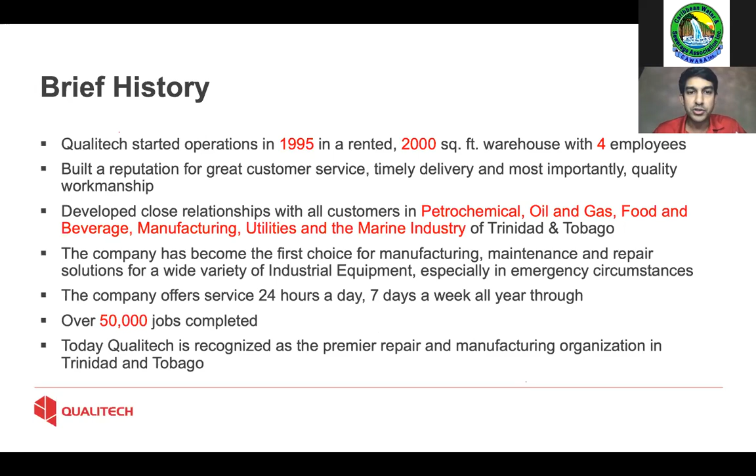And basically, as time evolved, customers kept asking us or challenging us to do more and more. So we would have started off manufacturing simple parts such as shafts, bushings, those type of things. And then it led to us overhauling equipment and even doing everything throughout the life cycle of equipment. So for example, we would engineer, supply, install, maintain, repair, and do diagnostic works on all types of rotating equipment. So we operate in the food and beverage sector, petrochemical, oil and gas, utilities, marine sectors as well.

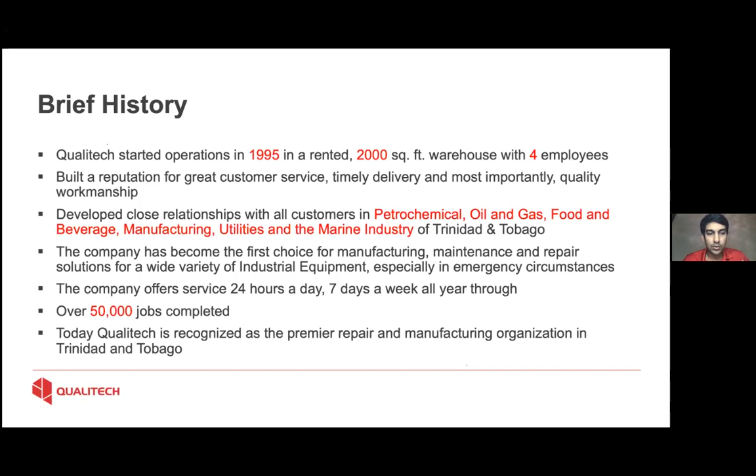We offer 24 hours a day, 7 days a week service, and we've completed hundreds of thousands of jobs. So I mean, this is an old slide, so it says over 50,000, but it's quite more than that.

The size of the company is just over 120 people. A lot of our employees are long-serving staff. All of our founding members of staff are still with us. We have over 100,000 square feet of workshop across 5 acres, which are 2 sites in the heart of the Point Lisas Industrial Estate. And we have a lot of various certifications, which I'll go through a little bit later.

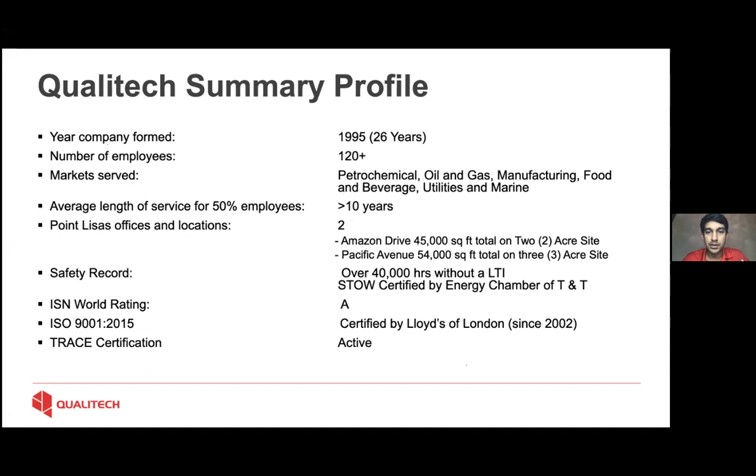So just so you see a little Google map overview, that's our company here. We have 1 site here, and we have 1 site at the end of the street over here. And all of this is the world-renowned Point Lisas Industrial Estate. So Trinidad being one of the energy pillars in the Western Hemisphere, we are the largest producer of methanol and ammonia in the world, or at one point we were.

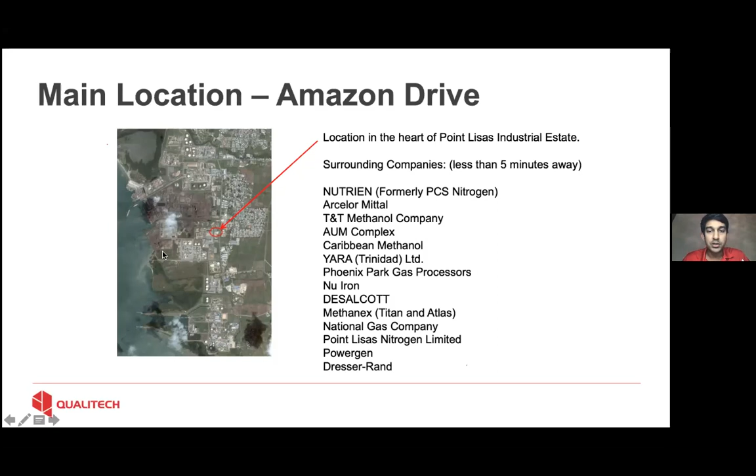Certification wise, because we have a lot of multinational customers, we have prided ourselves on operating as if we are an international player, because we have to compete with the same level of service as that you would have in the UK and America and other parts of the world. So that is one of the reasons we chose Lloyd's, one of the biggest insurers in the world, as our quality management system certificators. So we are ISO 9001 certified since 2002 by Lloyd's of London. So that's just about 19 years.

We're the first SKF certified rebuilder of pumps in Latin America. So SKF, you would know, is a very popular manufacturer of bearings. They're a global company. We're the first authorized repair center for a company called Philadelphia Gear in the world. So they're one of the oldest manufacturers of gearboxes, over 100 years, 125 actually. And they would manufacture things like the gearboxes that would be on the crawler for the platform that would take the space shuttle to the launch pad, large Navy vessels and so on.

Locally, we have something called STOW certification, which is a standard of safety and is mandatory for you to do work in the energy sector. NFPA, which is National Fire Protection Association of America. We are one of the few EASA accredited workshops in the Caribbean. So EASA is a body that is responsible for electromechanical repairs, such as pumps and motors. So we are the first accredited workshop in the Caribbean and South America.

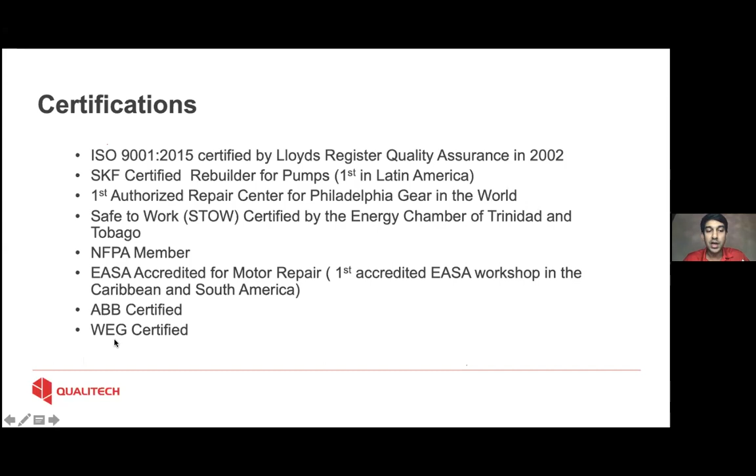So a little more into Qualitech now. We have different divisions: industrial, we have manufacturing, distribution, engineered product sales and service, project execution and management, electrical division, where we repair motors, generators, and so on, and also rentals. So we do every single thing you could imagine to rotating equipment.

So from your pump, your motor, your gearbox, engines, compressors, turbines, we would do everything from manufacturing parts to disassembling it fully, inspecting it, telling you what is wrong, refurbishing or manufacturing the parts, assembling it, and to some extent testing as well, so that you are sure that what we repair is 100% in working order before we send it back to you.

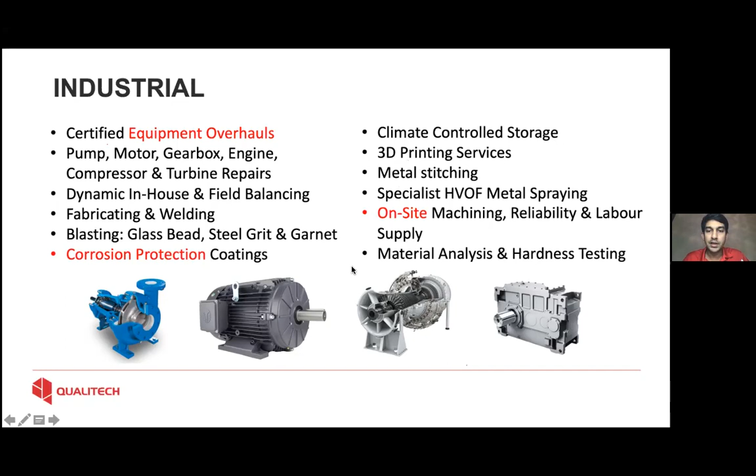The list is quite exhaustive, but some of the more interesting things would be like 3D printing, corrosion protection, fabrication on site. So we actually have the ability to come on site and machine things like flanges and skids for your different equipment, a lot of different things. So there's very little we cannot do when it comes to equipment.

We have a lot of manufacturing capability, which I'll go on further into the presentation, where I can actually show you where we could manufacture impellers from a sample. And over here of interest, we have some of the latest technologies, which are 3D laser scanning, 5-axis milling, and abrasive water jet cutting. So you're literally cutting steel with water.

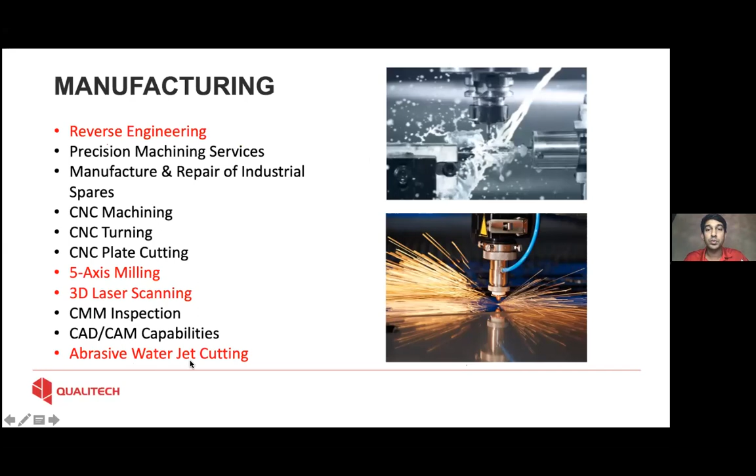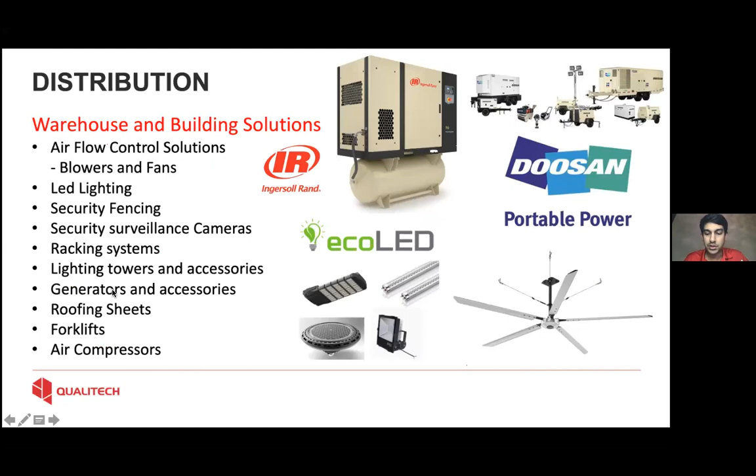Some of the brands we represent: Ingersoll Rand, LED lighting, mobile compressors and generators, lighting towers, and a whole host of other stuff. Everything to do with warehouse and building solutions. We're the agents for Bobcat in Trinidad and also different parts of the Caribbean.

Project execution: you need labor to do a project, you want us to engineer a design for you, you want us to execute it. We could arrange all of that sort of project management. From a supply side, we do a lot of stuff in the petrochemical sector: valves, actuators, rotating equipment, process equipment, heat exchangers, a whole host of stuff.

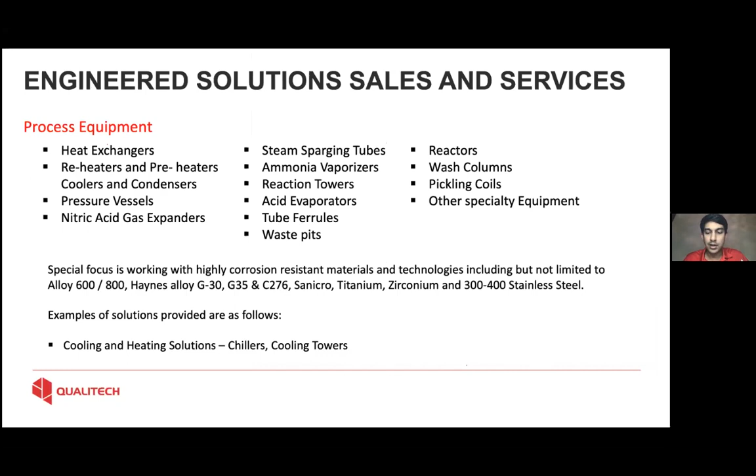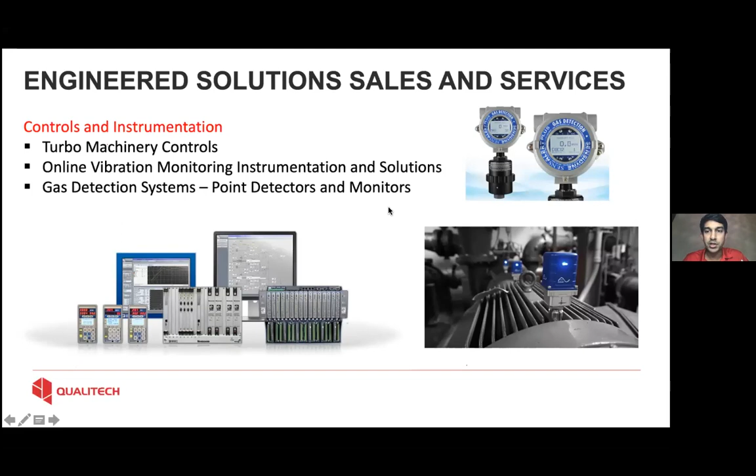Instrumentation and controls. You want remote vibration monitoring of the equipment so that you don't have to physically go out there to see what's going on with your equipment. It feeds you back information so you can see if your equipment is high in vibration or behaving unusually.

This is the electric side of the business, so we can repair motors up to 5,000 horsepower and generators up to 2,000 kilowatts. And that's full disassembly, inspection, rewinding, troubleshooting, you name it. We're quite capable of doing that.

This is just to give you an example of some of the sizes of motors. This is close to a 4,000 horsepower motor, and this is the same one that was completely refurbished, and this is just a shot of one of the motors that was burnt out, being rewound with fresh wire.

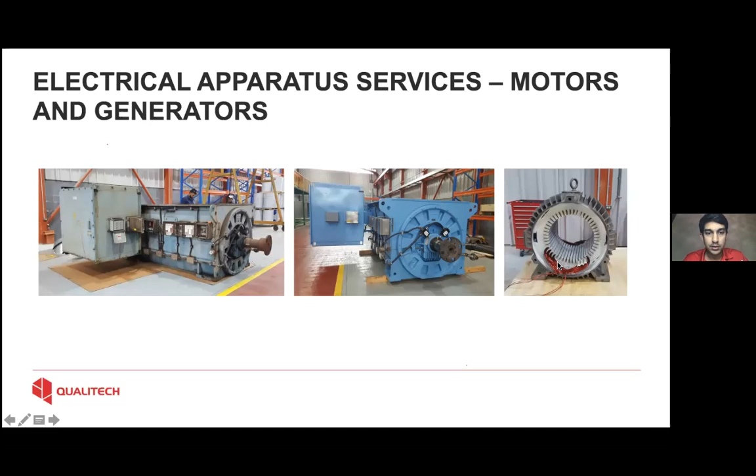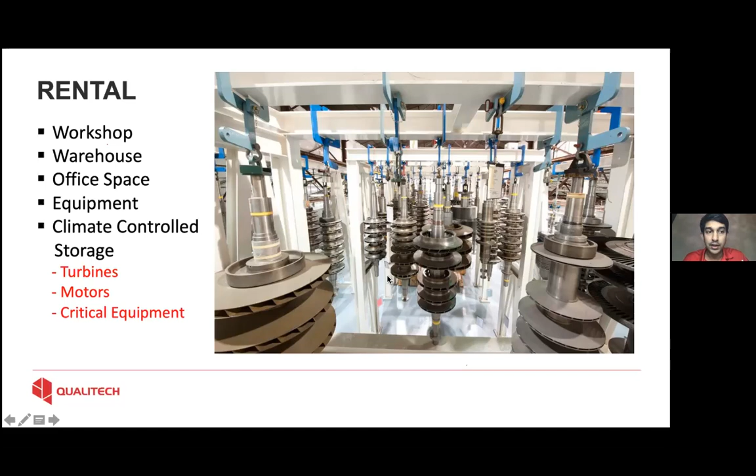We do specialized storage, so we have something called humidity storage, because as you know, the humidity is quite high in the Caribbean. So sometimes if you store products in a warehouse, even though it's sheltered and enclosed and even air conditioned in some instances, you still get rust developing. So we have special climate control storage facilities with dehumidification, where you remove moisture from the air.

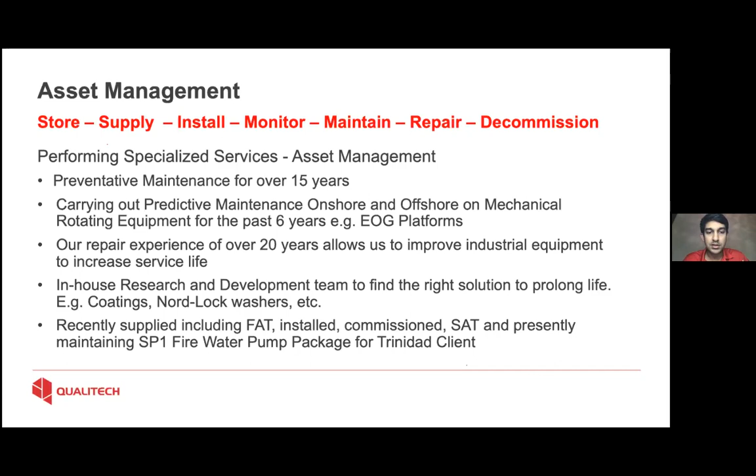This stuff we went through already. This is the whole chain of where we fit in with regards to equipment. And we've also recently added on engineering design. So we've done a lot of work with all the offshore platforms, and we have a lot of specialized solutions, because I always like to tell clients that whenever we do something, we want to do it so your equipment lasts longer. We don't want to see the same equipment coming in for the same repair, because we like to recommend solutions. So that is something we're well known for.

So moving on to the meat of the presentation now: improving pumps, motors, and other equipment. Qualitech has completed thousands of pump and motor repairs for a lot of petrochemical plants, like I mentioned. We've done work in some of the Caribbean islands, such as Grenada, Barbados, Jamaica, Trinidad, of course, and Guyana.

And some people might ask, well, why turn to the Caribbean for repair capabilities when you have the OEM? A lot of pumps and motors and other equipment in the Caribbean we would bring in from the US, the UK, parts of Asia. But one of the downsides of having the OEMs in these countries is that the lead times are long, because oftentimes spare parts are not off the shelf.

Pumps and motors are sometimes very specialized equipment, especially when you're dealing with larger pumps and motors. So it's often very difficult to get a spare impeller or a spare shaft, spare bushings, and all that sort of stuff. So that is why at Qualitech we can actually reverse engineer parts. If you give us a shaft that is worn, we can actually manufacture a new one from the old one. We'll go a little bit more into that later.

And this is basically to save time. Shipping time, as you know, is quite lengthy. Sometimes if you ship via sea, it can take 2 weeks to a month out of the US and the UK. And if you're shipping from Asia, it takes about 2 months by sea.

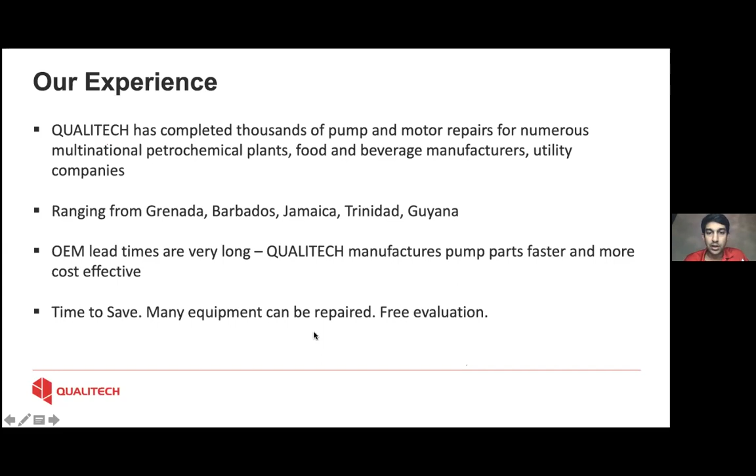So these are some of the reasons why Qualitech started into this kind of business, because the petrochemical sector is a fast-paced industry. Downtime is not tolerated at all, and everybody wants their jobs done yesterday. That is a phrase we often come up against, and that is why Qualitech is outfitted with a lot of these global type technologies.

This is often a sight I see when I go to different water authorities around the Caribbean. There are these quote unquote bad pumps and motors laying around. So when I see these things, I look at it from the perspective that the majority of this cost is in the wet end and also your column pipes.

So if something is wrong with this, it may be something very small in the internals that can be fixed. So here we have 3 large assets, or fairly medium-sized assets, that have been rendered unusable. But I always encourage clients, if you think it's unusable and you're willing to ship it across to us, we can evaluate it for free and let you know if it's repairable or not. If it's not repairable, we can dispose of the asset for you.

And if it is repairable, we can quote you and get your spares in a better position, because it would have been quite expensive to buy these 3 pumps here, and they've been laying in the yard for quite some time, as you see grass growing. So it's really about, in these hard and trying times economically, making the best use of your assets, especially the ones that are in the laydown yards.

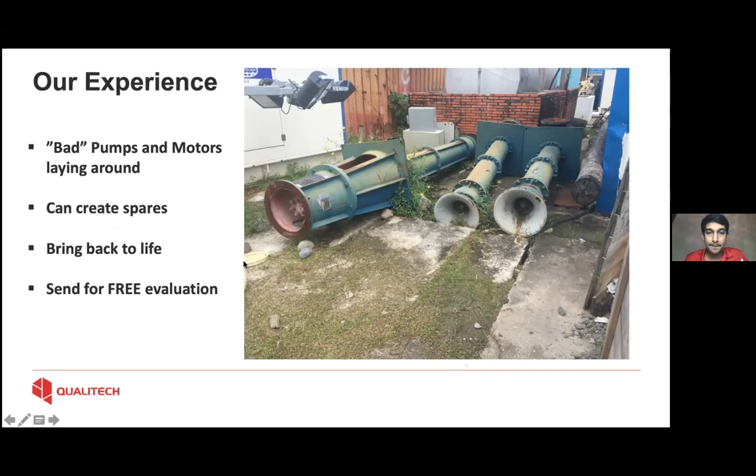And from these, depending on what it looks like, we can also create spares and create some redundancy in case you have emergencies with your existing equipment. At least you have a backup. So going a little bit more into the presentation here, what I have done is I've selected certain parts or types of equipment and basically described what we do to enhance it.

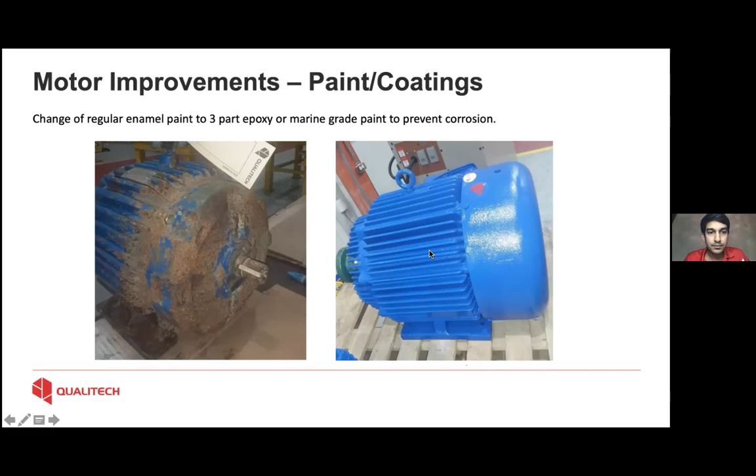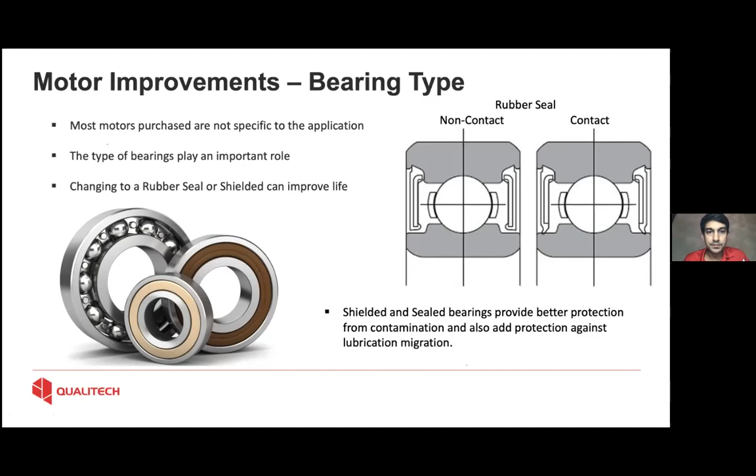Another one we see quite often is the fan guard. So on the motor, you will have your fan, which provides cooling, and your fan guard is basically to protect the spinning fan from hitting anyone's fingers or getting caught up with anything. So over time, you get these fan guards being rusted, and people would normally buy an entire new motor, or they may get a spare fan guard from the manufacturer.

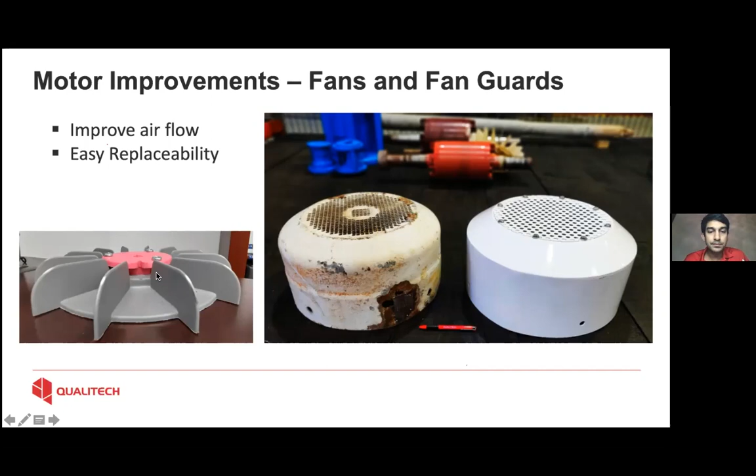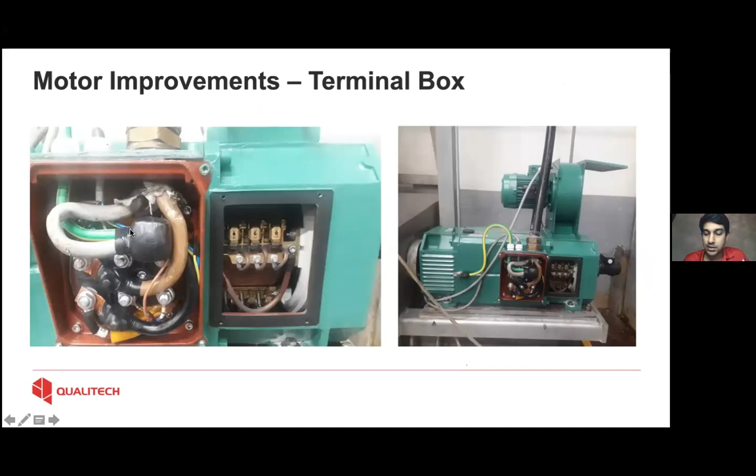For vertical oriented motors, we actually improved the design by making what we call a top hat. So in your vertical type pumps, if you have heavy downpour, as we do in the Caribbean, especially during hurricane season, a lot of the water will enter straight through the fan. And if the seal between the shaft and the housing is not in good order, you find all of that water now rushing into the internals of your motors, which could cause damage and even burning.

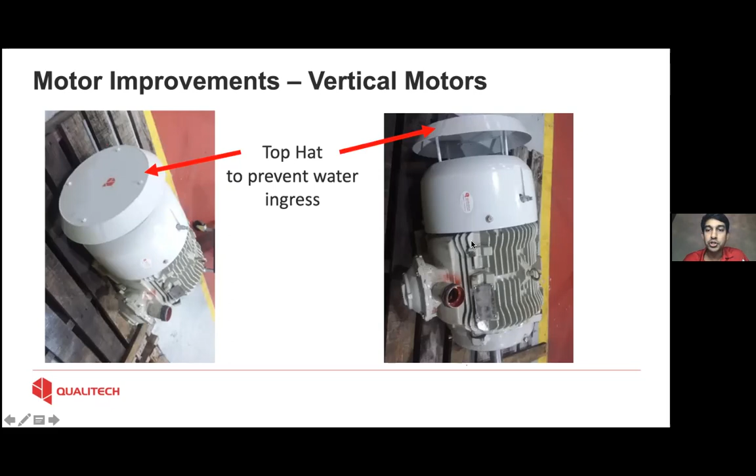So to prevent a lot of this torrential downfall from going directly into the motor, we design a simple top hat here that will remove 80%, 90% of the water from coming straight into the motor fan guard area.

Over time, we've seen a lot of failures where upgrades are being considered. So as you know, the application of VFDs or variable frequency drives is one to conserve energy. You don't want the full rated speed of your motor. So the VFD basically will throttle that down. So when you don't need to pump at full capacity, it will vary it from, let's say, 3,600 RPM, you could go down to 800 RPM. So you save that energy.

What happens though is some motors are not VFD friendly. So what we do when we repair motors is we use something called an inverter duty wire. What this means is that you increase the capacity of the wire in the motor to tolerate higher temperatures. So when you put a VFD onto a motor, you want to really make sure that that motor could handle the VFD, because of the VFD varying the frequency, you get higher temperatures in your motor. And if your wire in your motor cannot handle that, you get a lot of failures through burning, right?

So that is just something to be aware of when you apply a VFD to a motor. You really want to check that motor and make sure the wire is inverter duty wire. Class H is what we use, which is a very high standard. I think it could take temperatures up to 180 degrees Celsius.

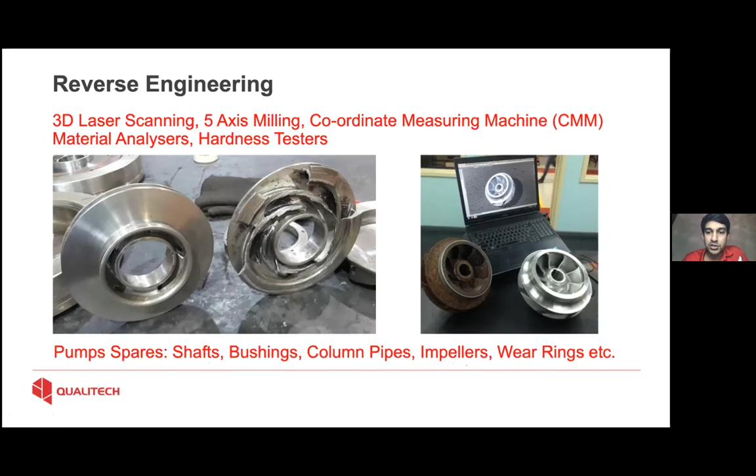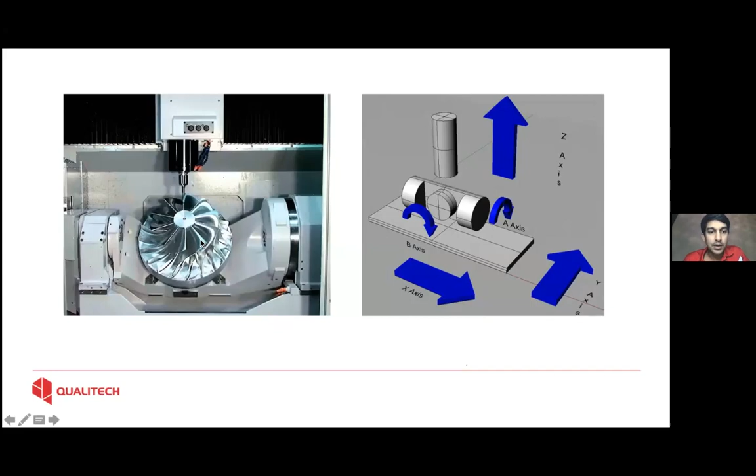So you may ask, why cut with water? Why not use an oxyacetylene torch or plasma? The beauty about cutting with water is that there's no heat. When you don't apply heat to metal, you do not alter the material properties. Sometimes with fabrication works such as welding, the sheet gets warped or bent, and even if you're working with straight pieces of metal such as angle iron or RHS, with a lot of welding, it gets distorted and bent, and it also weakens some of the joints. So that is one of the reasons why we use water jet cutting.

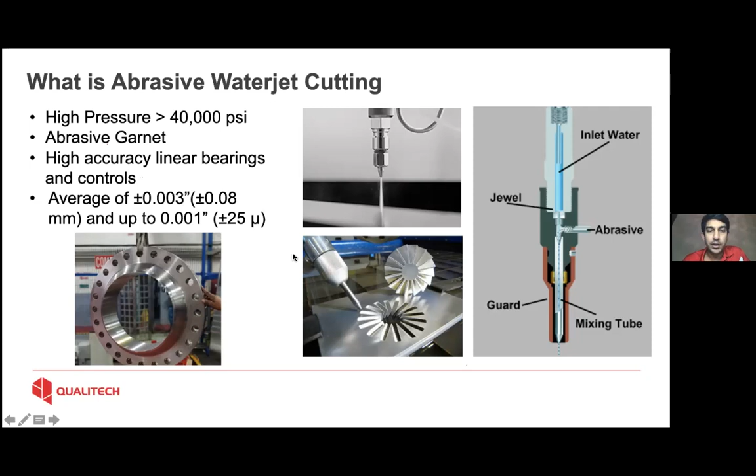Some of the advantages too are that you can cut very thick material, up to 8 inches thick: steel, stainless steel, stone, glass, plastic. Like I mentioned, little to no finishing or post-processing, no high temperatures involved, a very high degree of precision and accuracy. And you can cut basically anything you could think about because all the drawings are done in a computer. So if you want to literally draw a shape, a pattern, a design, you can water jet cut that out of any sheet material.

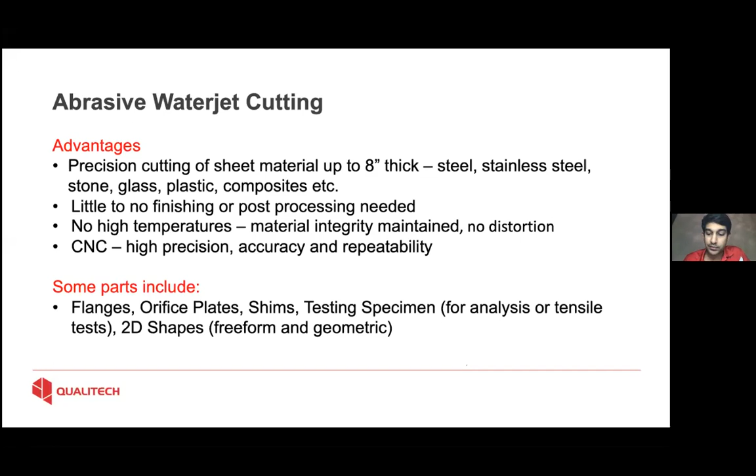Another thing we do that can extend the life of your equipment is called abrasion resistant coatings. For example, in pumps, and I'm not specifically talking about water authority type pumps here, you have other pumps in manufacturing such as slurry pumps, or pumps that would pump a product like sugar water or salt water that is very harmful to the internals of the pump.

These abrasion resistant coatings, when you apply them to the impellers or the casing or inside of the pipes, prevent wear over time. For example, in the water authorities, you may have large pipes that suffer what we call wall loss. Over time, water and different chemicals in the water erode the internal of the pipe. So the thickness gets thinner, which could lead to holes and eventually leaks. So abrasion resistant coatings help prolong the life of these pipes and also the parts inside of the pump.

We've had cases where clients would actually send brand new pumps to us to coat them with these abrasion resistant coatings, and they get an extra 5 to 10 years life. What it also does too is that it prevents the internals of the pump or the pipes from getting rough over time. So it maintains a smooth glass-like finish, which helps with the efficiency of the pump, and it also prevents corrosion. So over time, the coating would interact with the medium that is being pumped. So it doesn't actually attack your raw material per se.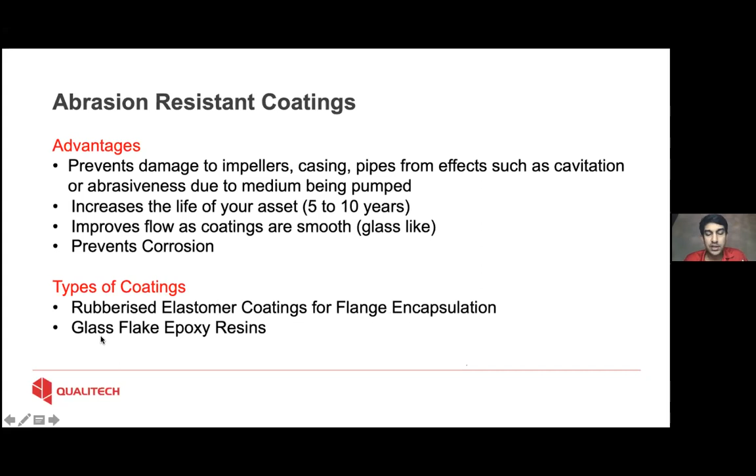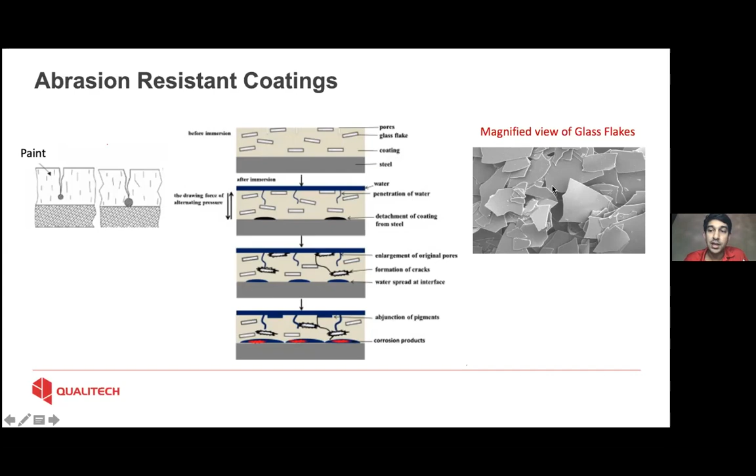You'll be surprised to know that these glass flakes are used in, if you have any ladies in the audience, a lot of nail polish. So that the nail polish doesn't crack, they actually utilize glass flake technology in nail polish. That's just an interesting fact.

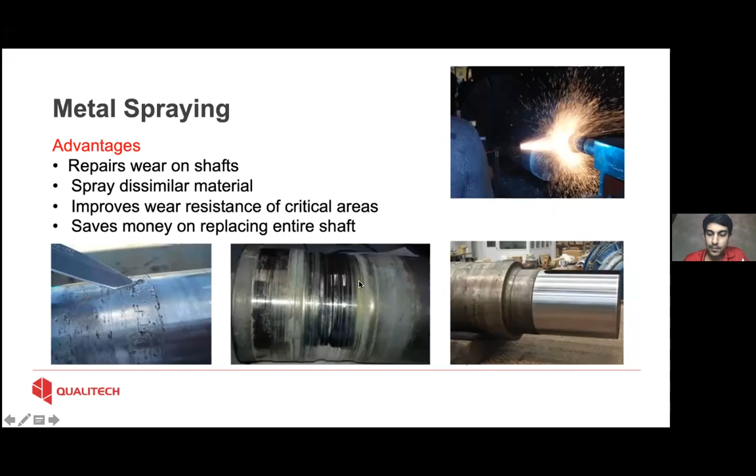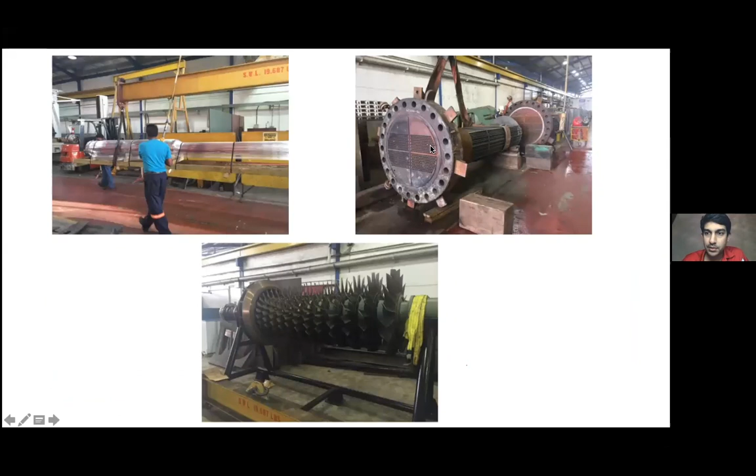These are some equipment we would have procured, a fire water pump, a vertical turbine pump. These would be some heat exchangers, just to give you some perspective in terms of the size of equipment we would deal with. This is a pump from Jamaica. These are some axial split pumps, horizontal split pumps, high pressure multi-stage boiler feed pumps.

So in this one in particular, this element of impellers would have worn and this would have dropped onto the casing. So here we're actually rebuilding with welding all of the different landings to bring it back to the original spec. And here we would machine it back to size.

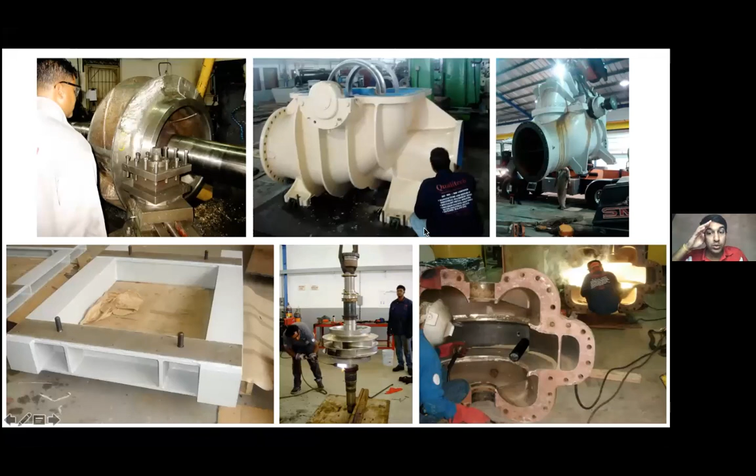These are some more works on pumps, again, rebuilding worn areas, two portions of the pump, removing the impellers here, manufacturing these skids. So sometimes you get a lot of corrosion with these skids. Some clients have actually invested in stainless steel skids, very expensive, but they don't want the hassle of having to repaint and repair, and then you're having downtime with the equipment. So they've manufactured skids out of stainless steel, so it lasts for a lifetime.

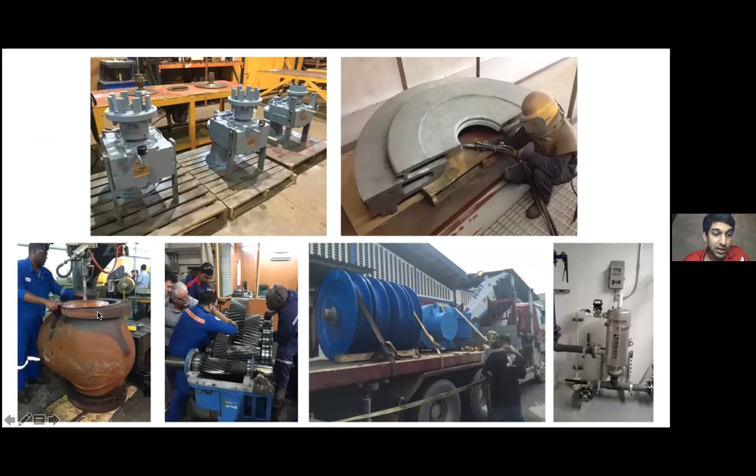These would be some gearboxes we'd have repaired over the years. Blasting technologies to clean, so this would be glass bead blasting, winches, a large gearbox for a ship to overhaul. This is a valve actually, one of the large valves on the plants where we are redrilling holes for the flange connection. Automatic filtration for potable water.

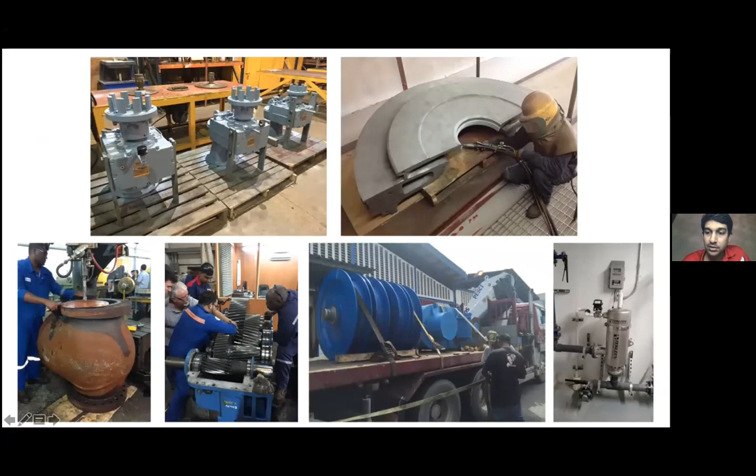So this is an automatic backwash filter. So when you have dirty water coming in here, if the sieve or the filter gets blocked up with debris, the pressure inside here increases and it initiates a backwash cycle. So the water flow will reverse and it will actually wash out all of the debris. So you don't have to keep changing filters all the time.

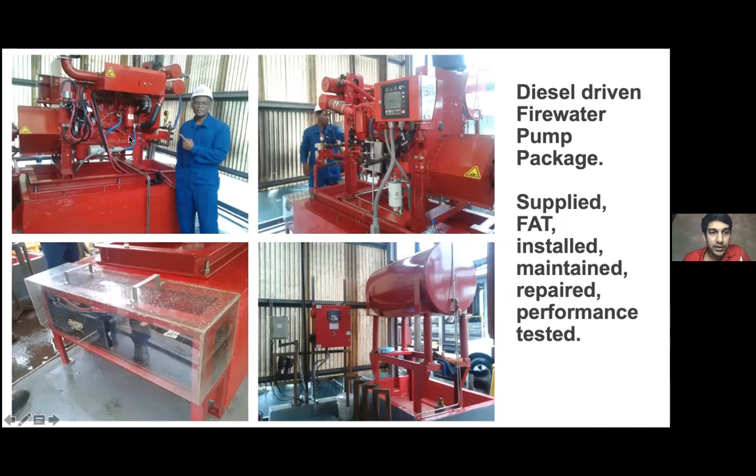This would be a full package of equipment, a diesel engine, electronic controller, diesel tank, valves, pumps, batteries that we would have supplied and installed for a client. And these are a lot of the different customers we'd have worked with over the years. So a lot of multinational clients, from Norway, America, Canada, Shell, which is Dutch, Canadian, British Gas. Well, that's no longer there. Shell has bought over them. A lot of manufacturers, Nestle, Blue Waters, electrical companies, cement plants, anybody really in the industry.

And yeah, that's a bit about what I recommend and some of what Qualitech does. And I open the floor to any questions.

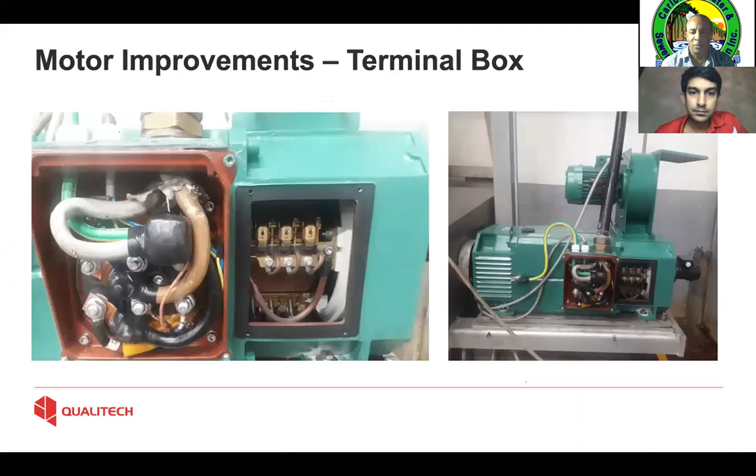Hi, afternoon, everyone. Yeah, thank you. Go ahead. It's not really a question, but more like a confirmation of what they're doing. We actually do wastewater treatment at one of the oil and gas companies that they do work for. That's PPGPL. Right. And so what happened is that one of the submersible wastewater pumps, on the design, there's one of the parts that the OEM representative in Trinidad did not have. We needed a second strainer on the suction.

There's one strainer that allows probably around 2 inches of debris, and then there's another strainer, probably polyurethane, that goes before it hits the impellers. One of the strainers got lost, and the client didn't want the pump operating like that. So we had to get it 3D printed. I carried the existing one that they had in the laydown yard, got it 3D printed, and it was well done.

So this is at Qualitech? Yeah, Qualitech. Okay. PPGPL only use Qualitech for any work as far as pumps, motors, and that kind of stuff. So us being a service provider there, and the equipment was down. Even the regenerative blowers, they do the work there also, and it was pretty well done.

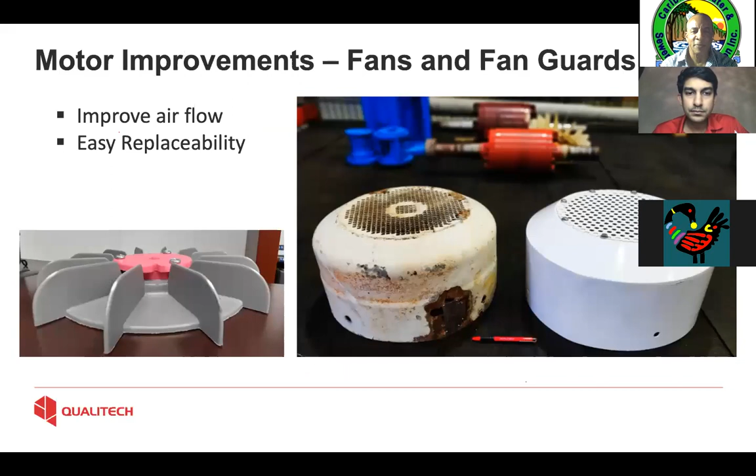Yeah, one thing I could probably comment on is the use of VFDs. When I attended the CWWA conference, I think it was in Jamaica, it was actually St. Kitts, there was a presentation by one of the technology experts at ABB, and they have technology now with the VFDs where they can throttle the speed of the pumps.

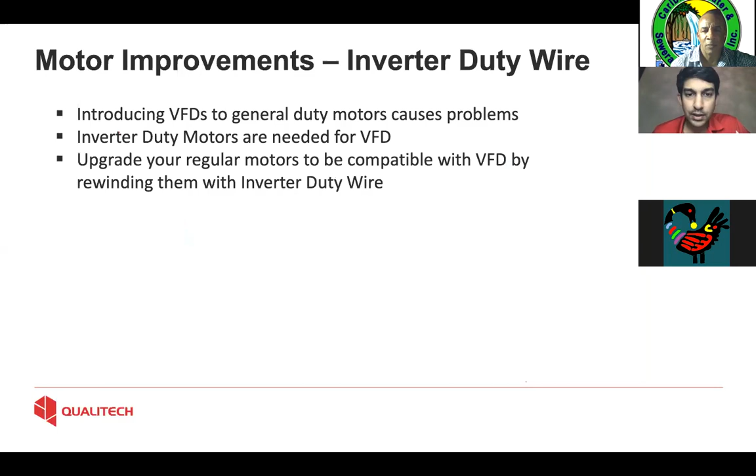So sometimes now they actually remove the valve completely. Depending on what flow you need, you either shut off the pump or you run the pump at a slower speed. So it's like to eliminate valves. I thought that was interesting when they presented on that. So that could kind of tie in with the future of the water industry.

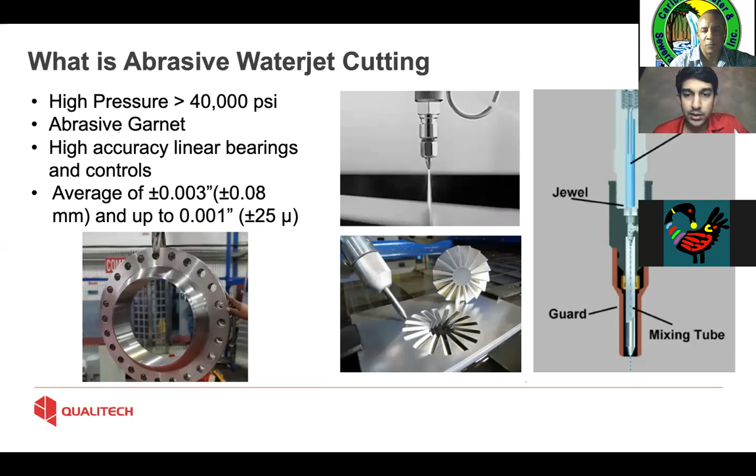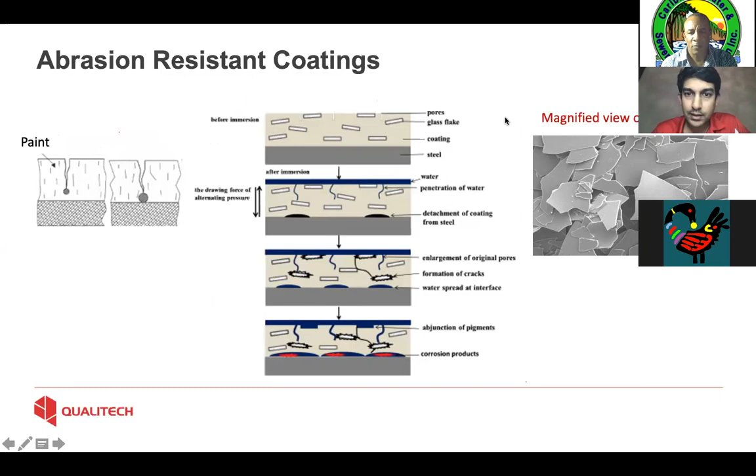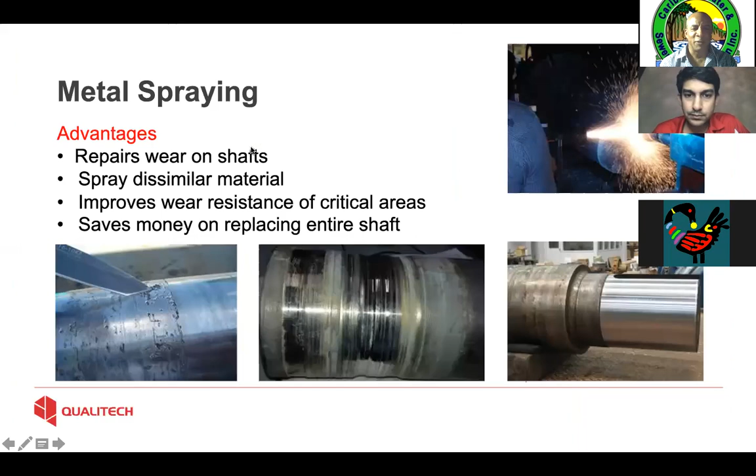I'll just cycle through the presentation in case it jogs any questions. I think we have one in the chat here, or thank you actually, thank you, Anderson, for your comments. Okay, well, you seem to have been very pellucid with your presentation, Mr. Lall, so I don't seem to have any questions. Any from you, Jean? Well, I don't have any myself.